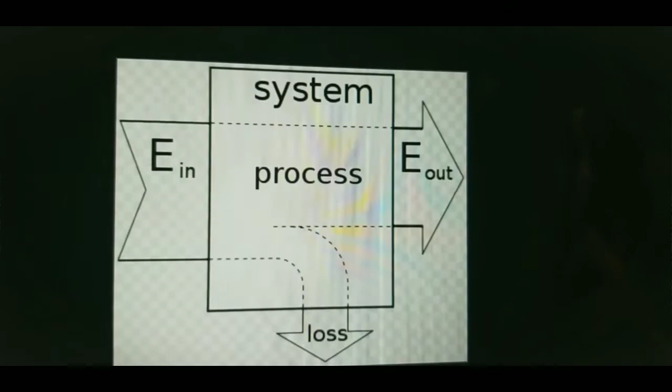Here the energy input is fixed, and our goal is to maximize output energy, and how do we lower the input energy if the output energy is fixed. For those of you who have taken MecE 340 and 371, this example should be familiar because we are solving every single question with this concept.

So from my perspective as a mechanical engineer, we could improve urban sustainability by building a more scientific structure for energy consumption.

In this section, we are considering the family cost of energy in urban cities. This is a pie chart of energy consumption in Edmonton. The most significant energy-consuming activity here is heating and water usage.

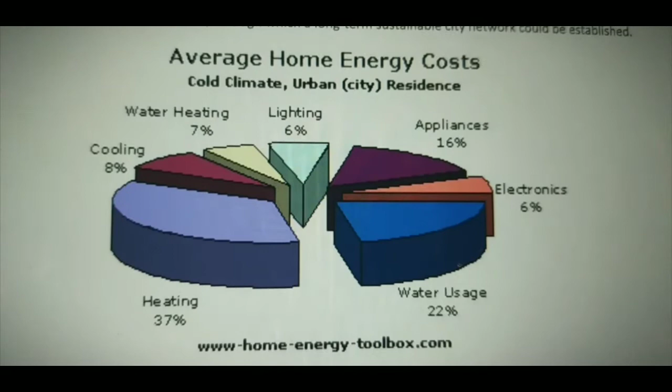As I just mentioned, we could make energy consumption more efficient through designing a more reasonable and scientific engineering structure for each house in Edmonton, and we are going to consider how the energy consumption could be reduced in this way.

For example, check this out. It is named net-zero home. There are a lot of mechanical features involved, but I will only mention some of the most important ones.

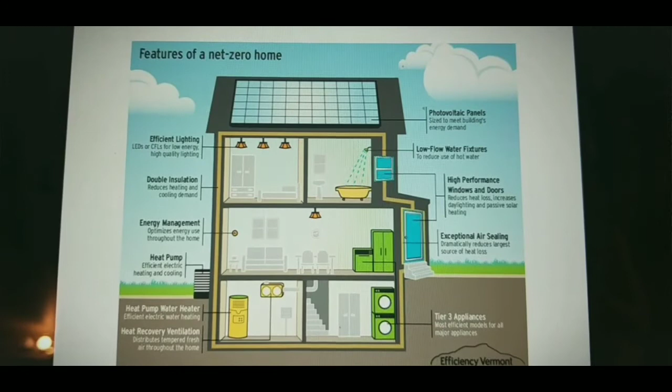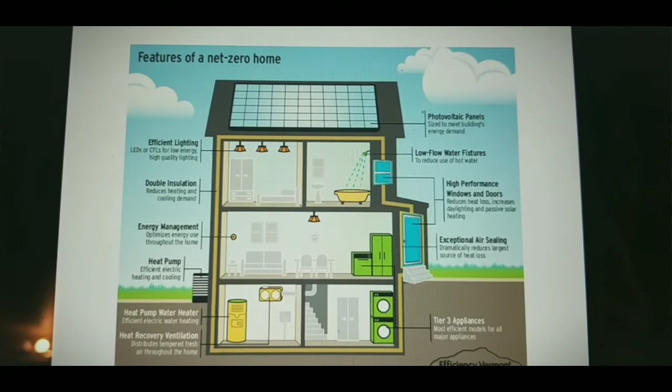The outer wall of the house is made with double insulation, which reduces the heating and cooling demand, while in Canada we only care about heating for most of the time. We all know that hot air travels upward while cold air travels downward. Therefore, the heating pump is set underground for better heat exchange efficiency.

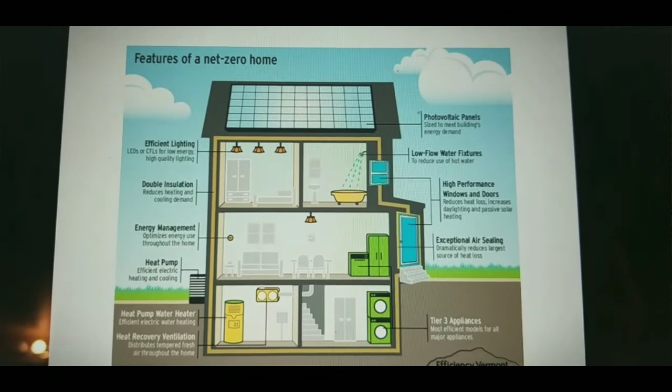The exceptional sealing for all windows and doors performs the same function here, and you won't annoy your neighbors when you're having a home party, which makes for a good sustainable relationship as well.

Since the majority of daily water use is by showering, energy control for this part is very important as well. Check the washroom here. The low-flow water fixture will save water usage for showering quite a lot.

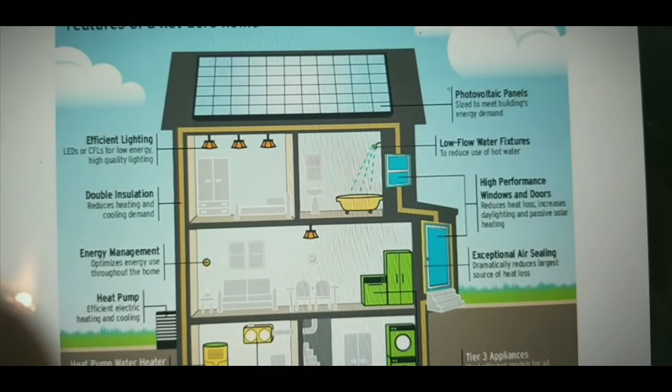You might think that the low flow pipe is just going to waste more water as your shower takes longer, but studies do show that the design saves water usage on average of 10 to 20%.

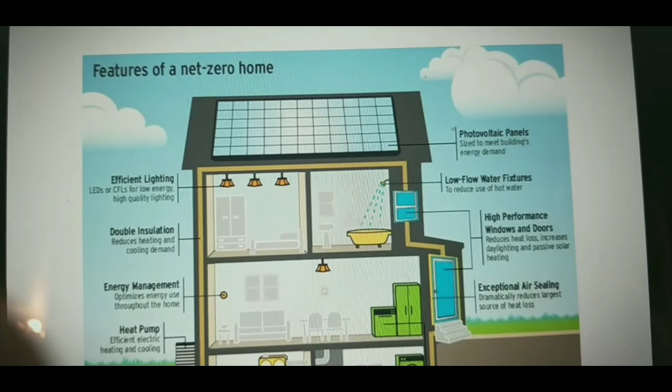So you may not have as satisfying a shower as you used to if you are living in a house like this, but you're actually saving energy for your grandson, your later generations, which you might not have right now, but you will understand what I mean.

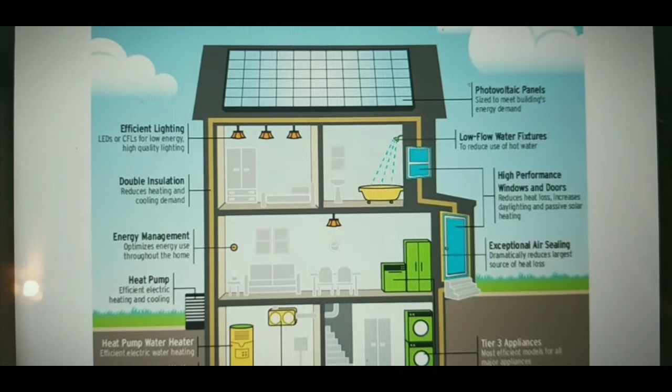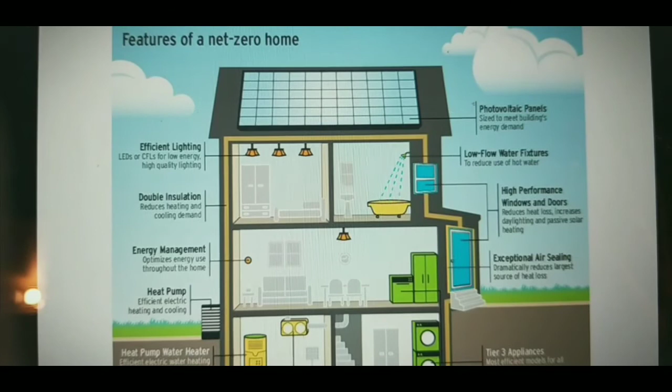And the last thing to mention is the photovoltaic panel hovering over the roof. This is a method of recycling solar energy for household usage. It could be used for LED lights and even the washing machine. It costs more money than the house structuring process, but the profit in the long term is remarkable.

There are still many things we could be doing to promote urban sustainability in mechanical ways. I just mentioned a few ways of doing it with an improved mechanical system, but we could still do things like recycling and stuff like that. It's hard to include all of them in a 5-minute video, but I hope you enjoyed the points I made.